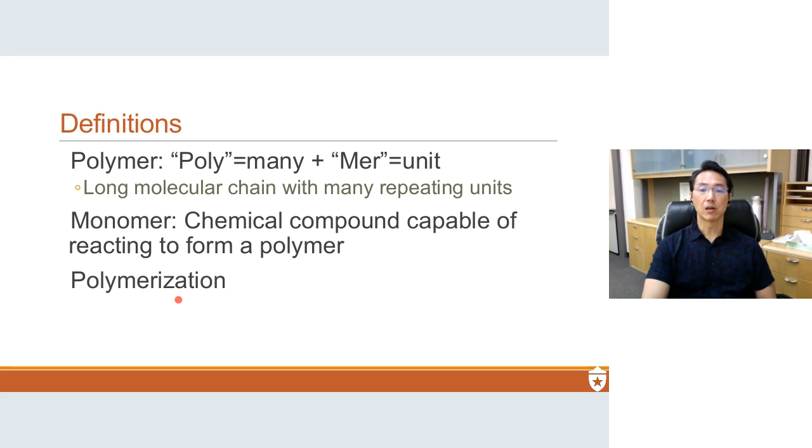So we have here: monomer plus monomer plus monomer, through polymerization, gives you a polymer, as you can see, where the molecules are connected, covalently connected to each other.

The simplest example is polyethylene, where you start off with an ethylene molecule, and you have the carbon-carbon double bond. Through the process of polymerization, this double bond is attacked and opened up, and so is this one, and they form a bond between each other, and now you get a long polymer called polyethylene.

So what we just saw was a linear polymer, where you have these mers connected to each other, forming a long chain.

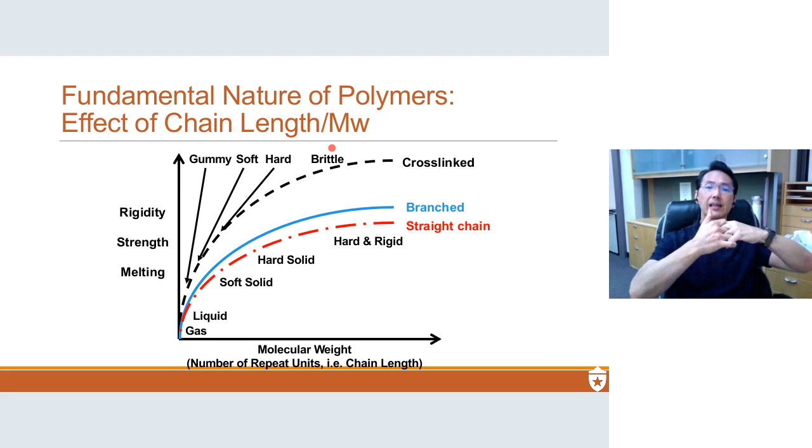And if you look at this, the fact that it becomes brittle here - not that these others are not brittle, they can be brittle if the molecular weight is high enough - but cross-linked materials become brittle much more quickly. And again, that's kind of why it is, because they can be locked into each other and they can't flow, like someone said. They can't be drawn.

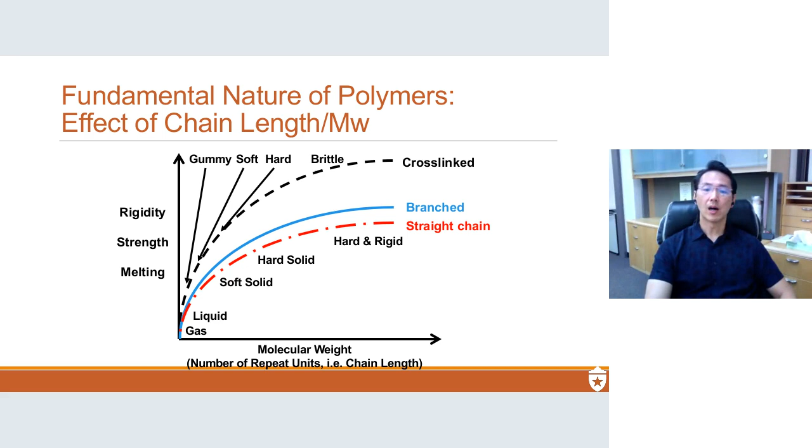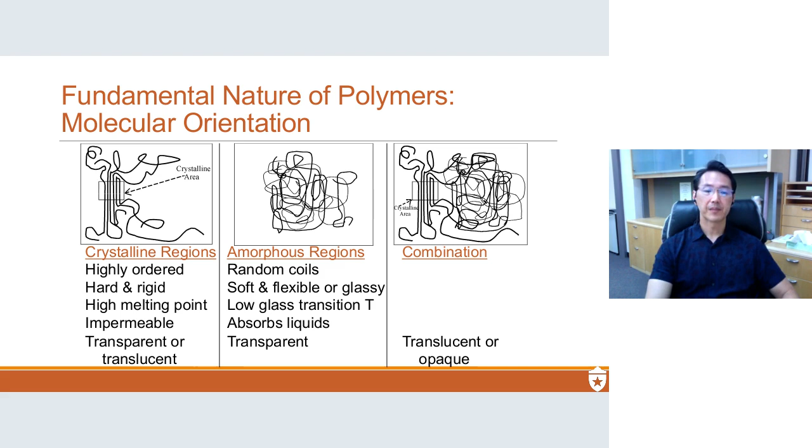So my second demonstration is actually using a plastic strip, and you can do this at home just to see what it feels like. This is Corey, by the way. This is actually a demo that I used to show my brute strength as well as finesse, and I asked for several volunteers to come down, male and female, strong and not so strong.

We have a little competition where the students come down and I give them these plastic strips, and they start to stretch it. The competition is to see who can stretch it to the longest strip possible. I can tell you without bragging that I've never lost this competition. So this year will be the first time I'm not able to demonstrate that, but Corey has done a wonderful job, so I wanted to show you how. If you listen carefully, she's going to try to tell you what it feels like as she is stretching. So listen to that.

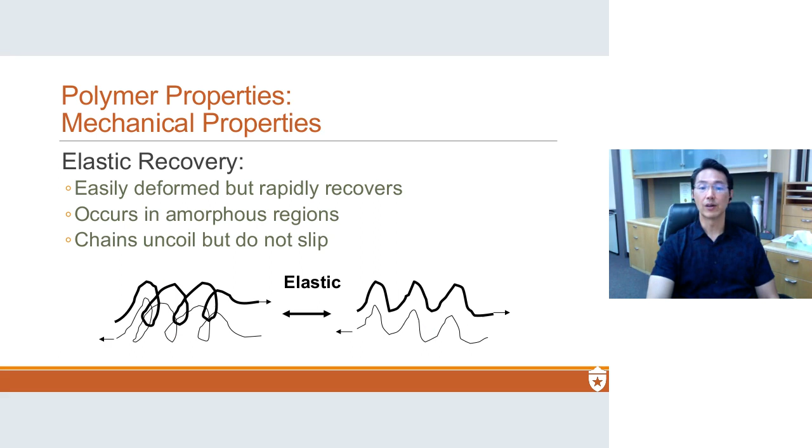And then the second part was the plastic deformation, where it's deformed and it can be molded, and the deformation is permanent. The chains do not uncoil, but they actually slip past each other, and it's irreversible. Once it slips past, you can't get it to unslip.

Now, in the case of polymers, as you saw with this demonstration, you have viscoelastic behavior. Viscous meaning plastic, and elastic meaning elastic—so it's a combination of both plastic deformation and elastic recovery. It applies to most polymers, and they're affected by chain length, cross links, temperature, and rate of force.

And what you have is as you stretch out, first it uncoils, then it starts to slip, and then it recoils a little bit when the force is taken away. And if you think about our stress strain curve, you have this curve that's initially straight—that's the elastic portion—and then it deforms. That's kind of what viscoelasticity is, and polymers all have that kind of stress strain curve.

Now it says here that it's affected by rate of force, the viscoelastic behavior. What do you think that means?

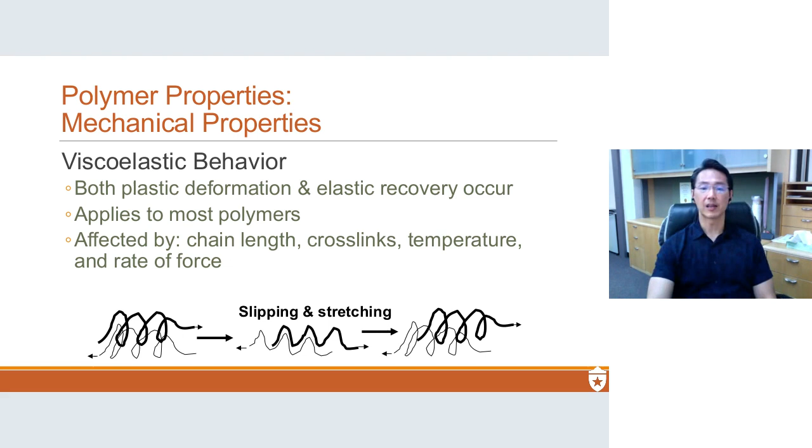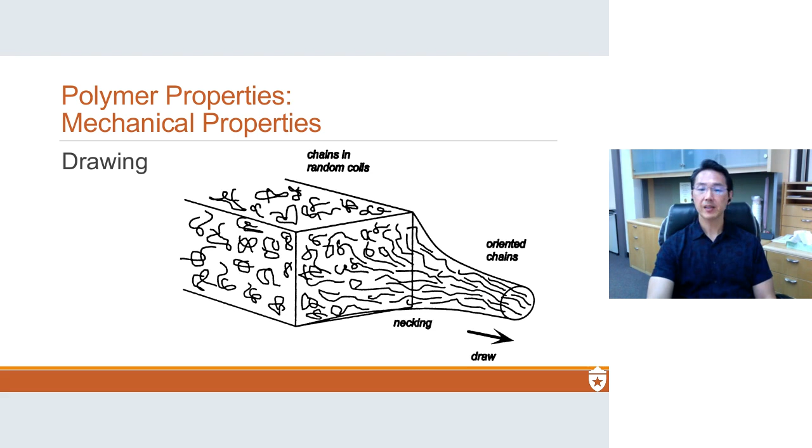That's what viscoelastic behavior is - basically both types of mechanical properties exist there. This is a schematic of what just happened. As you have these amorphous regions and pull together, you start to orient the chains and give it a crystalline orientation.

To show viscoelastic behavior, here's another demonstration. We're going to cure polymethyl methacrylate, which is widely used in dental materials and medicine. PMMA, which we'll talk about more in a few weeks, has applications as impression trays, denture material - that's the big application for dentistry - and bone cement in orthopedics. Polymethyl methacrylate is really the basis for how we developed composite filling materials.

PMMA polymerizes through a process called addition polymerization, which we'll talk about later. As it polymerizes, we're able to see a whole bunch of different material properties. I had Corey, who's been doing research with me on developing an antimicrobial polymethyl methacrylate denture material - she's an expert in making this - so I have a video of her doing different stages of it.

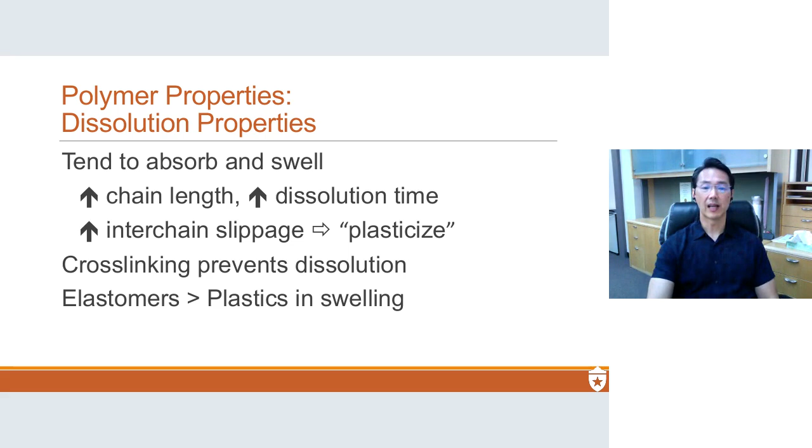So for my next demo, we're going to look at crystal soil. This demo, I actually had a different demo before, but one of your colleagues from the class of 2017, Kristen Rodriguez, came to me one day with the crystal soil and said, Dr. Wine, this is a wonderful demonstration of polymer swelling. And sure enough, it was. So crystal soil is made by using acrylamide monomer and polymerized into polyacrylamide.

Incidentally, the same material, although not in its same form, is used in diapers. So if you know anything about diapers, basically they absorb a lot of water, right? That's the whole point of having a diaper, right? And so crystal soil is used instead of soil to hydrate the plants. And when you place it in water, it can absorb 80 to 150 times its volume in water. Okay, so I have a little demonstration of that here.

So this is crystal soil, and you can see how small it is. And if I drop it... I don't know if you can see that, but it's completely elastic. It's very hard, very glassy kind of a material.

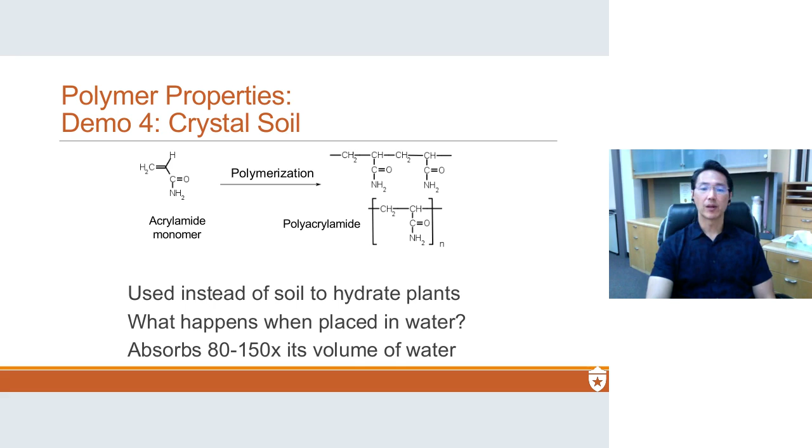The next property, the final property we're going to talk about for polymers today is thermoplastics. Thermal properties. For polymers, they exist in two types of thermal polymers. The first type is called thermoplastics, and what that means is that when you heat it up, they become softened, they become softer. When you cool it down, they get hard again.

We talked a little bit about this before with glass transition temperature, which we will look at in a bit. But if you heat it up, it gets softer. When you cool it down, it gets harder. You can mold it when it's heated up, and if there's a way of molding it back to its original shape when it's heated up, and you cool it down, it'd go back to that. So it's reversible in that sense. There are no chemical bonds that are formed during this heating process.

However, another group of polymers are thermosets, and these are cross-linked polymers. They're called thermosets because they can be formed or cross-linked using heat as an acceleration for the polymerization. So if you did that, then you would have a liquid or a soft solid, and you would mold it into shape. Then you'd heat it up. Then it would polymerize and cross-link. And then when you took it out, you would have a definite shape.

And even if you heat it up again, you cannot soften it. Well, it softens a little bit, but you cannot have it plastically deform. It'll just hold a shape. That's because the cross-linking bonds the neighboring chains together, so you can't flow the material. This process is irreversible. Once you set it into a certain shape, you can't unset it. That's why it's called thermosets. So those are the two types of materials that we tend to see.

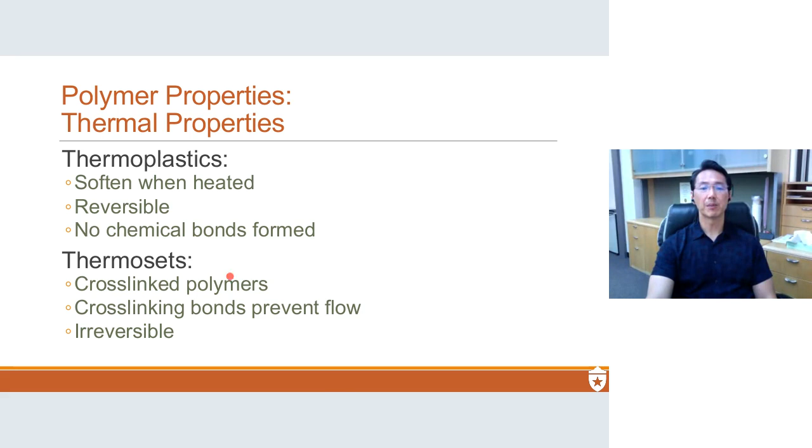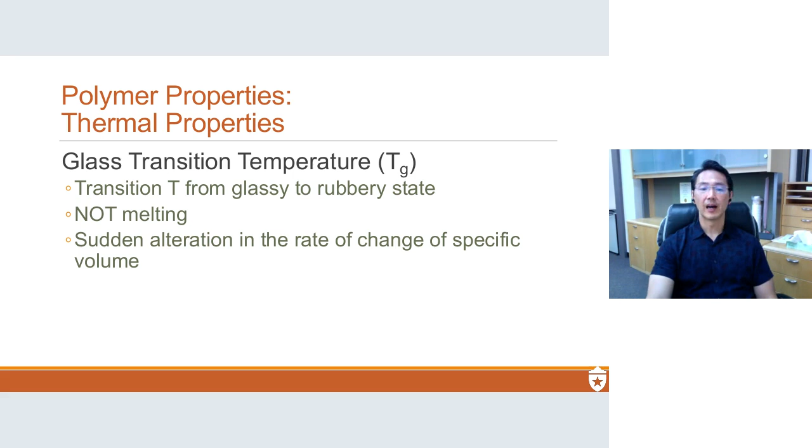Now, as we describe this more, I mentioned a little bit about glass transition temperature. Basically, that's the transition from glassy to rubbery state. It's very important that you understand that it is not melting. In a technical sense, the actual definition of glass transition temperature is a sudden alteration in the rate of change of specific volume. So let me illustrate that with this graph.

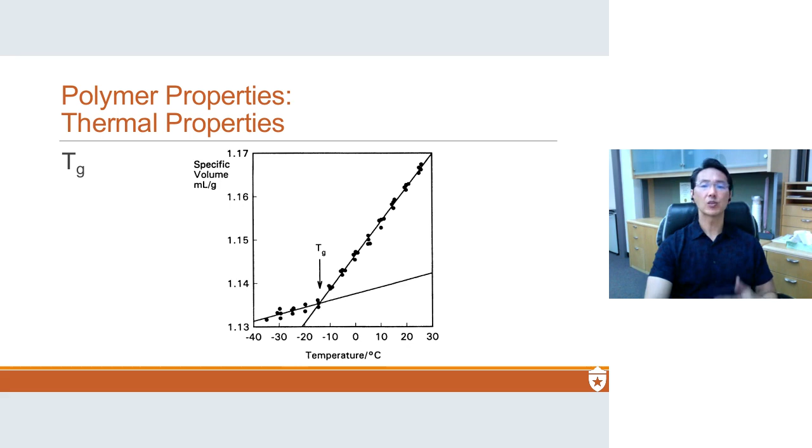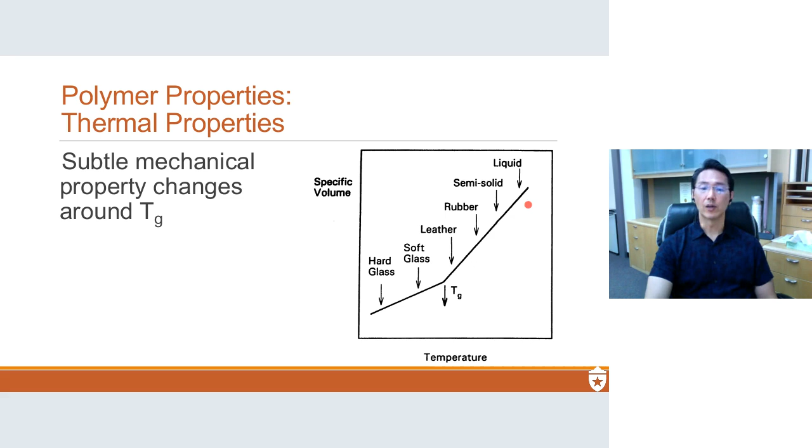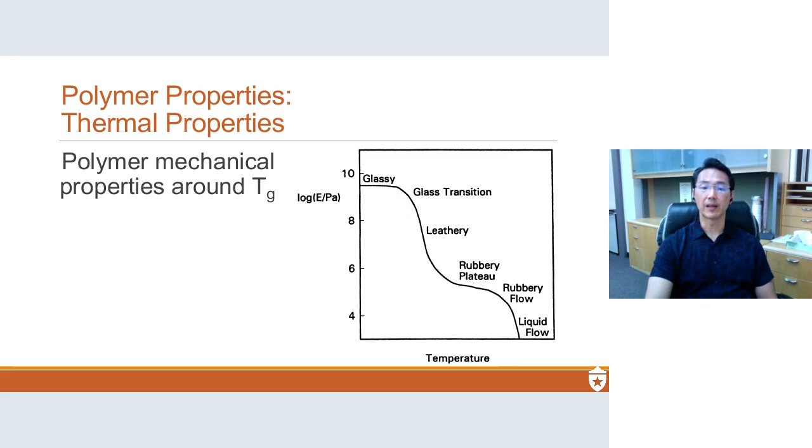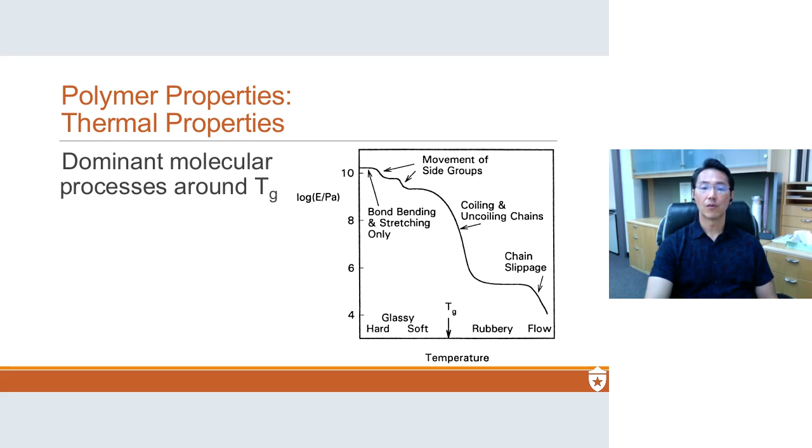For my next demonstration, I used to do a demonstration with suture material. Polylactic co-glycolic acid is a suture material, and what I did was I made a really nice puck out of this, and it was a very glassy puck. I had students come down and try to break it or bend it, which they couldn't. Then I left it in a 60-degree water bath, and after that, you can see that it was very leathery. Unfortunately, one year I had this really buff guy, almost as strong as me, and came down and he actually broke the thing. So I no longer have this demonstration.

However, I realized, as I contemplated what else to do, I came across this video, and I actually realized this was a better demonstration than what I had, so we can watch this.

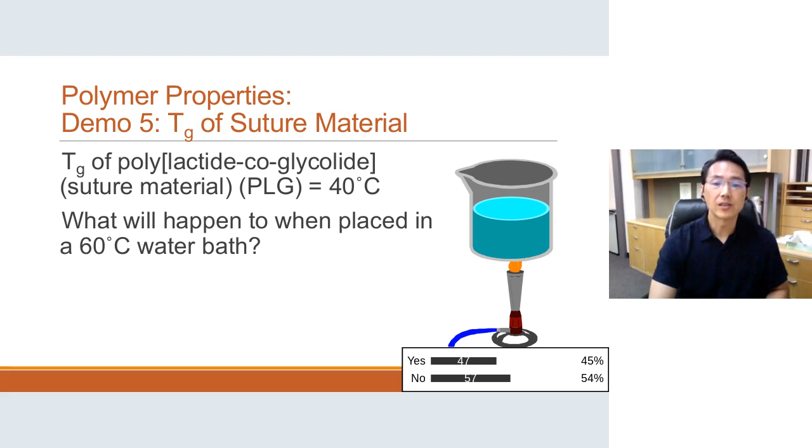So actually the last part of the polymers lecture is chemistry of polymerization. We're going to start off with addition polymerization, which is what polymethyl methacrylate does.

There are four steps to this polymerization process. First is activation: you have an initiator, something that can form a free radical, and in the presence of heat, or at room temperature with an accelerator, or light in the case of dental composites, it's able to become a free radical. With our polymethyl methacrylate denture material, the initiator was benzoyl peroxide, and it had an accelerator that caused it to become a free radical.

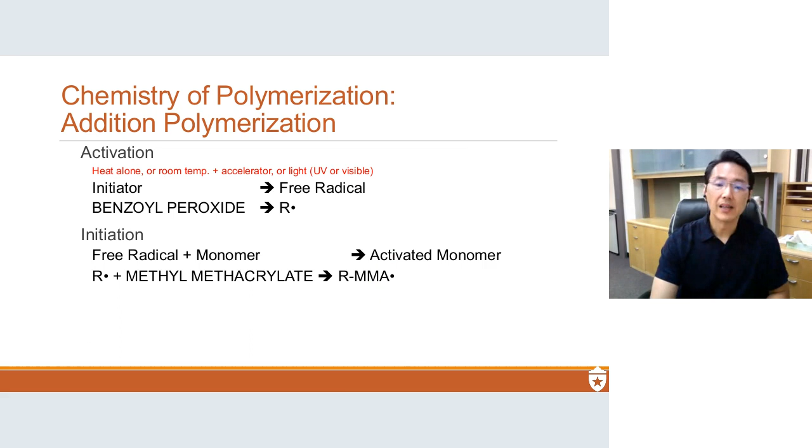The next step is the free radical attacking a monomer, methyl methacrylate, becoming an activated monomer—you can see the free radical at the end of the monomer. Then propagation, where the activated monomer attacks another monomer and the chain starts to grow. Finally, termination, where two activated monomers or polymers bump into each other, since they have two free radicals, they react with each other and terminate the reaction. So that is addition polymerization.

A second type of polymerization is condensation polymerization, one of the two main types. It's also called step growth polymerization, because in this situation it's not like you grow a chain—whenever the reactants are there, they just react together in one step. The monomers react simultaneously, and a catalyst is used.

Usually, not always, but usually, small molecules are condensed out, for example water or hydrochloric acid, and that's why it's called condensation polymerization. This is an older name; the more scientific name is step growth polymerization, because there are some reactions where you do not have any condensate.

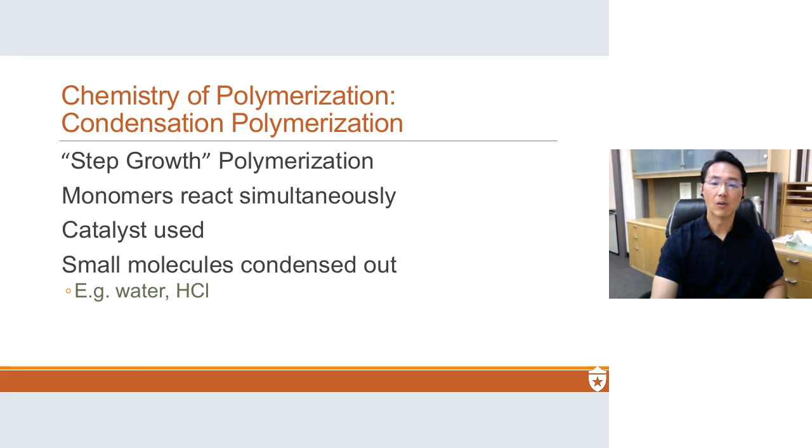My last demo for this lecture is the nylon rope trick. Basically, nylon is made when you react sebacoyl chloride and hexamethylene diamine together in the presence of sodium hydroxide, and you form nylon, a polymer. You have a condensate, which is sodium chloride, and of course there's water left over.

One disadvantage of this polymerization reaction is that if you have condensed byproducts and that is able to evaporate, it can cause porosity and shrinkage. If it stays there and does not evaporate, it can plasticize the polymer. So that's a disadvantage.

Here is the video of the demo. We actually do this in class.

So I'm pouring in sebacoyl chloride in chloroform, and I quickly pour in the water phase, which is hexamethylene diamine in sodium hydroxide, which is in DI water, distilled water, or deionized water. You can see from all the smoke that something is happening there as I pour that in slowly.

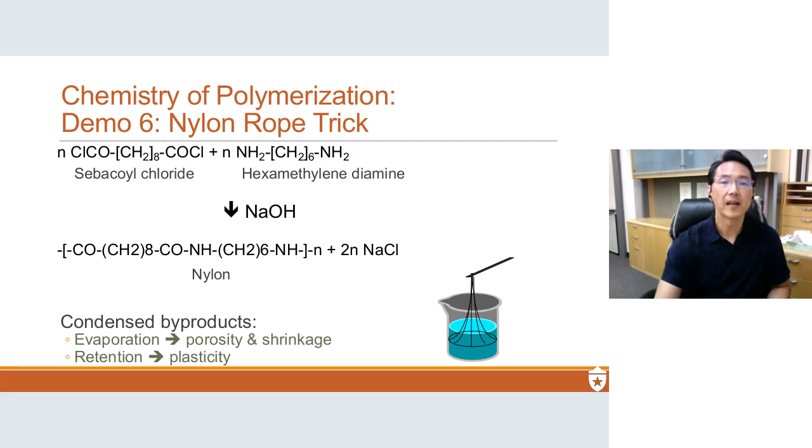Okay, so let's continue then and move on to our next lecture, which is the first application of polymers, and that's dental waxes. The only reason we talk about dental waxes first is because that's what you have already started playing with in the lab component of the dental anatomy module. So hopefully this lecture will help you understand what you are using.

We'll get to some of the other finer points as we talk about this. So, dental waxes are very widely used. They soften when heated, solidify when cooled - well, that's just what we learned about polymers. They can be readily molded without cracking, which is something I'll be talking more about - it's a kind of unique property of waxes.

I do not believe you get to see this in your current lab because you are doing the drip wax technique, which I was a little surprised to find out because that's not how you're supposed to mold your wax. But anyway, I think for whatever purposes you're doing right now, that's what they're using.

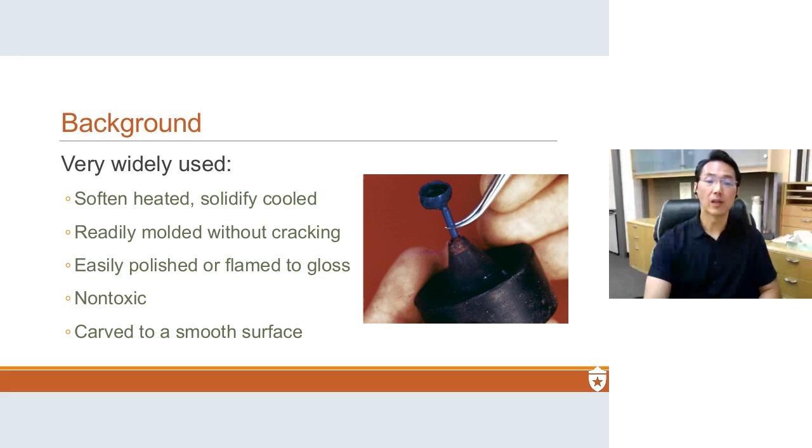But anyway, waxes are used for that as well as other things. So waxes are moderately large hydrocarbons. They are polymers technically, but a lot of times when we talk about polymers, we talk about polymers with higher molecular weight. A small molecular weight polymer would be called an oligomer, usually about 10 repeating units or so.

Waxes are relatively large hydrocarbons. They are larger than oligomers, but they are not often referred to as polymers. They have weak intermolecular forces, which gives rise to some material properties like very large thermal expansion, a very low yield point or yield strength, and poor dimensional stability.

Before I move on, I just want to talk about this word stability. Throughout my lectures, you will often come across the terms stability and accuracy. The difference is that accuracy is when you first make something, it comes out accurate - it represents what you want it to make: size, shape, surface detail. Stability is after you made it, over a period of time the dimensions don't change, or they do change. So stability is over a long period of time, accuracy is as soon as you make it. So waxes have poor dimensional stability.

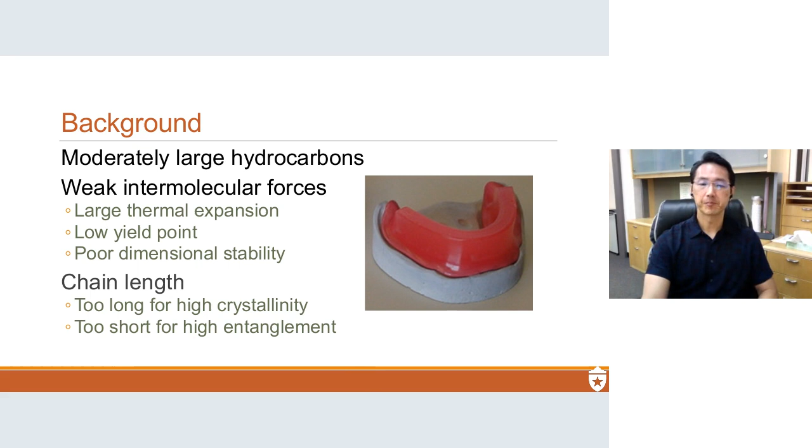So the simplest of waxes are the alkanes, which is polyethylene. But in this case, it would be a very low molecular weight polyethylene. The chain lengths are generally larger than 17 repeating units, and at that point you get a melting point of about 22 degrees Celsius.

But they're not the only polymers that are in waxes. You have esters, which have ester groups in the middle, and these are the most common in dentistry. You have alkanols, where you have an alcoholic hydroxyl group at the end, or alkanoic acids with carboxylic groups at the end.

So you can have mixtures of this. Mostly they are esters and these alkanes, and that's what gives rise to waxes and their kind of unique properties.

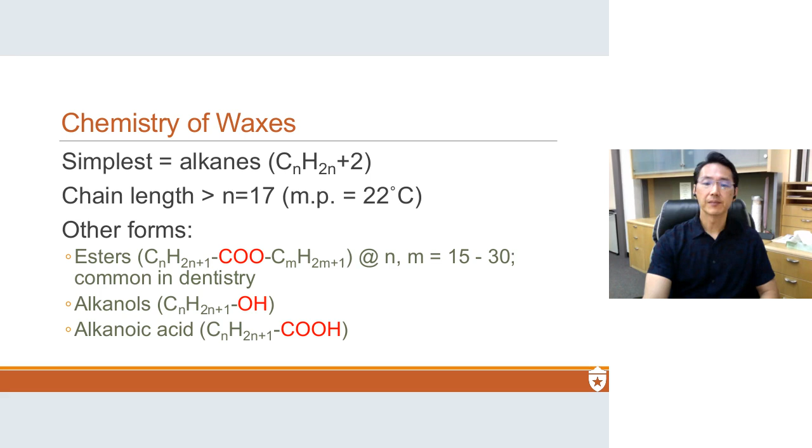Overall, waxes can be categorized as natural or synthetic. Among the natural waxes, you have mineral waxes, where paraffin is the dominant one that's used, and that's obviously what you use for candles. They're mainly linear and branched hydrocarbon chains.

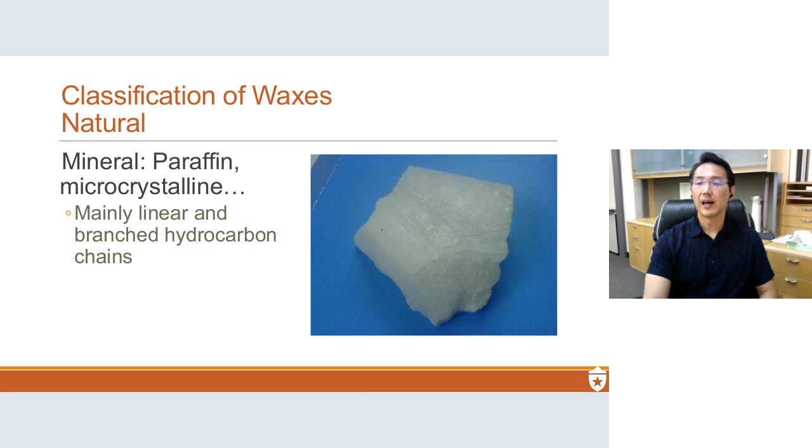Another very popular natural wax is plant waxes, and one of them is carnauba, which is very strong for a wax and is used a lot for waxing cars. These are mainly esters, hydrocarbons, alcohols, and/or acids, so they have a mixture of all of these different types of polymers.

And it is one of the main components of dental inlay wax. There is also insect waxes, like beeswax, and that's kind of where we get the name wax from. As you can see, there are just various different forms of waxes in nature.

One thing to understand about these waxes is that it's not like a polymer where you only have one type of molecule. Waxes have a variety of different polymers in there, as well as other additives, and that's why they behave differently from some of the synthetic polymers that we have.

The other type is synthetic wax. The advantage, of course, is the uniformity in chemistry, and they're also much larger polymers, so they'll be stronger. However, that's kind of not what is needed as far as properties for dentistry are concerned, so they really have very little utility as far as waxes in dentistry.

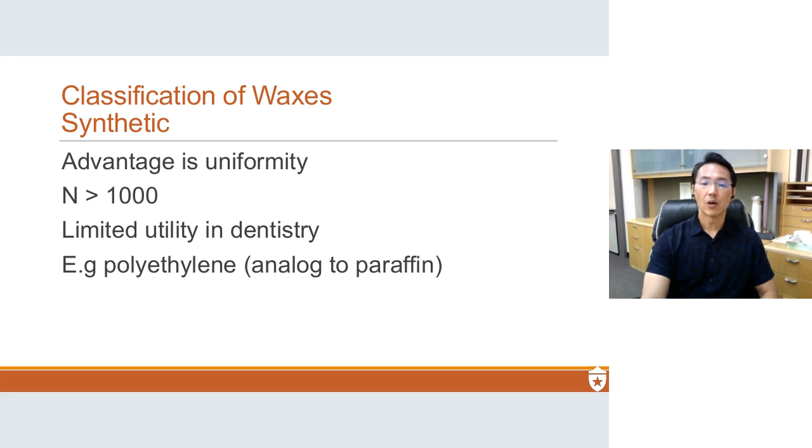So when we look at dental waxes, there are two major classes of dental waxes and a third minor class. The first major class is pattern wax, and like the name suggests, they are used to create patterns, forming a general predetermined size and contour for restoration.

A disadvantage of these waxes is that they have thermal dimensional change. In other words, they're not very thermally stable, and they tend to warp upon standing. That's because they have to be able to reproduce very fine detail, so they need to be softer than some of the other waxes.

Used for crowns and bridge units and so forth, and they're used in this lost wax technique where you invest it, then you heat it up and all of the wax is lost. Then you put in the metal or metal alloy to create the pattern.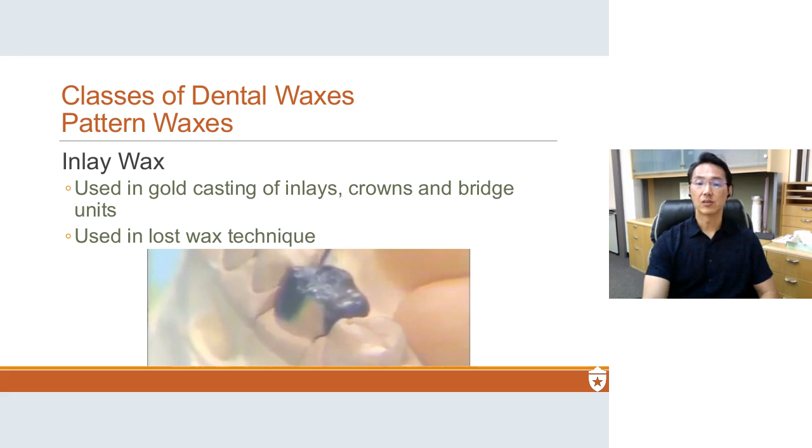The second type of pattern wax - these are kind of straightforward, the details are all in the handout, so I'm moving past these pretty quickly because they're not really concepts. The second type is the casting wax.

As you can see, these are used for metallic frameworks of removable partial dentures. You can see here how this has been waxed up for a denture framework. This also uses the lost wax technique and casting investments to make a metallic framework like this.

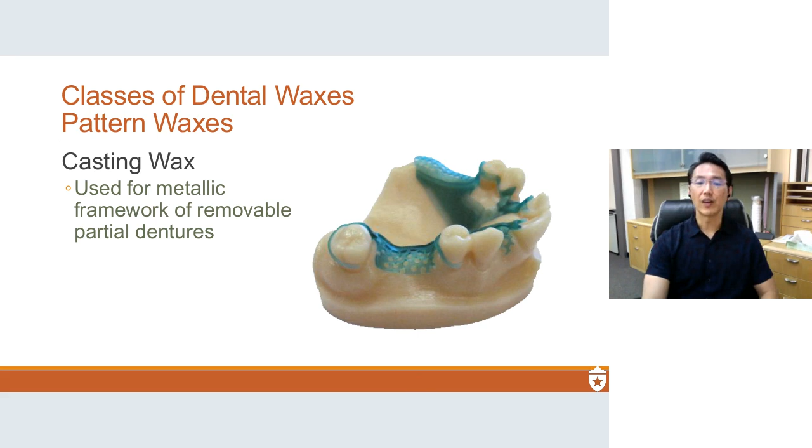They're used for indirect applications, so casting waxes can come in different forms. You have these preformed bars, or they have meshes. They also come in clasps and different retention forms, so it just makes it easier to make those patterns.

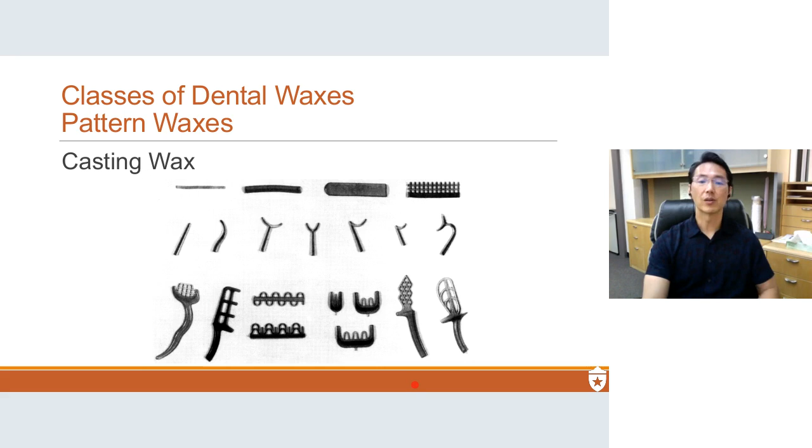The third pattern wax is the base plate wax, used in full denture construction to establish the vertical dimension and plane of occlusion, as you can see used here and over here as you create these dentures.

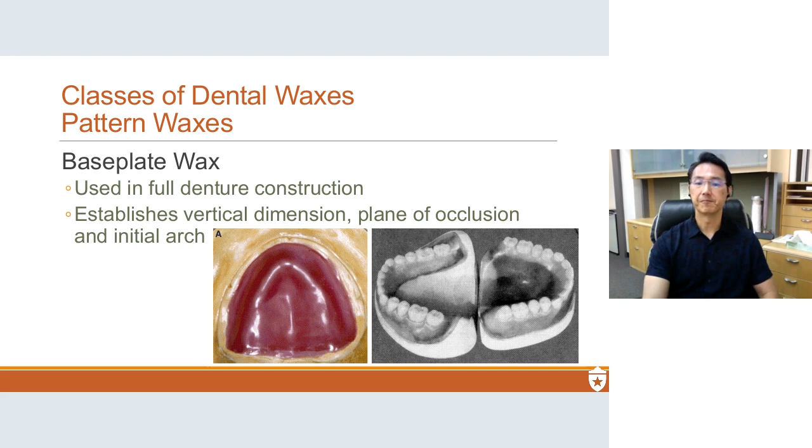Base plate wax can also be used as a bite rim, as you can see here, to restore the occlusal relationship, register arrangement of teeth, check the denture inside the patient's mouth, and so forth.

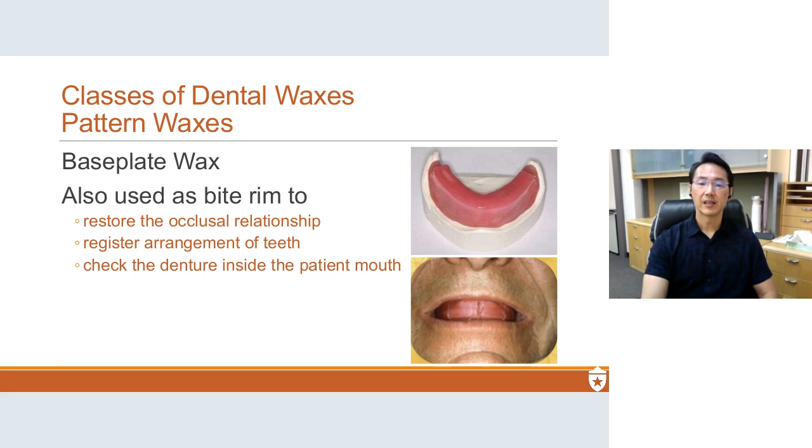You also have utility waxes. These are used in many different applications. You can use them to extend trays, build up the edges when you put in the impression material, and so forth. And they can come in both stick and sheet forms.

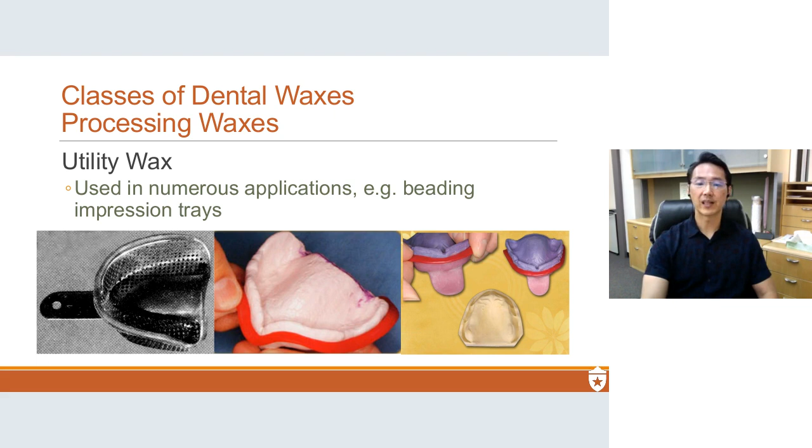The third type of processing wax is sticky wax, and it can be used for temporary holding of broken dentures, for repair and things like that. The unique thing about sticky wax is when you melt it, it's really sticky, and when you cool it down, it becomes very firm and brittle.

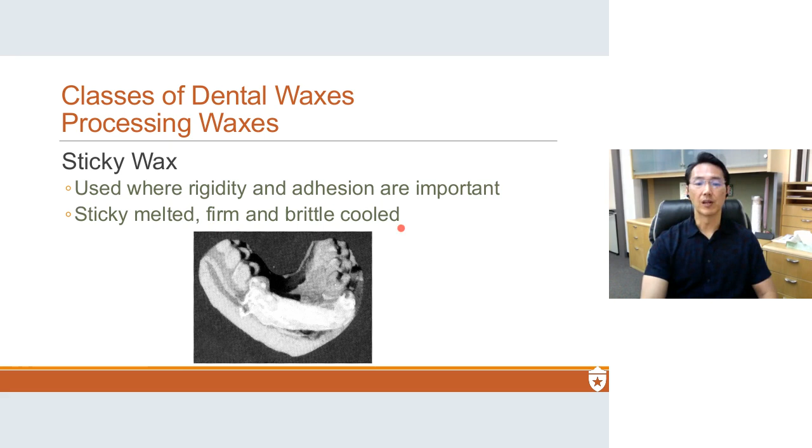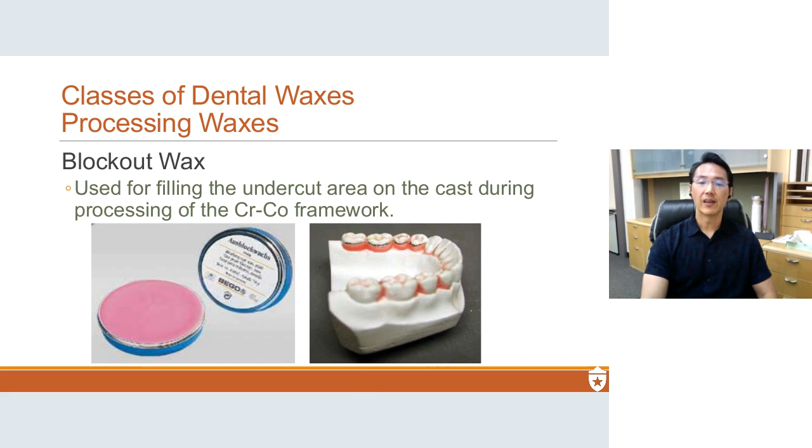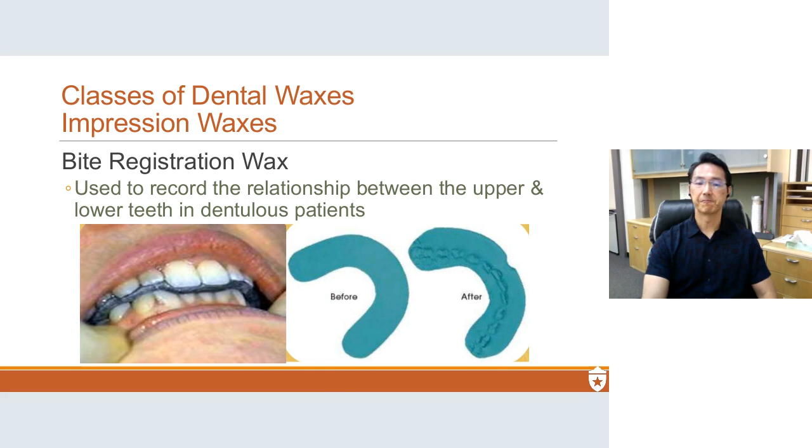So dental waxes not only have these polymers, but they've got some other additives as well, such as gums, fats, and resins. Gums are generally plant products; they're viscous, amorphous, and harden when dried. They're a mixture of hydrocarbons, so other kinds of polymers.

Fats are basically glycerol and some other fatty acids, and they're mainly used to modify the melting range and to soften paraffin. Resins are plant products used to modify melting range, hardness, adhesiveness, flake resistance, gloss, and toughness of the wax itself.

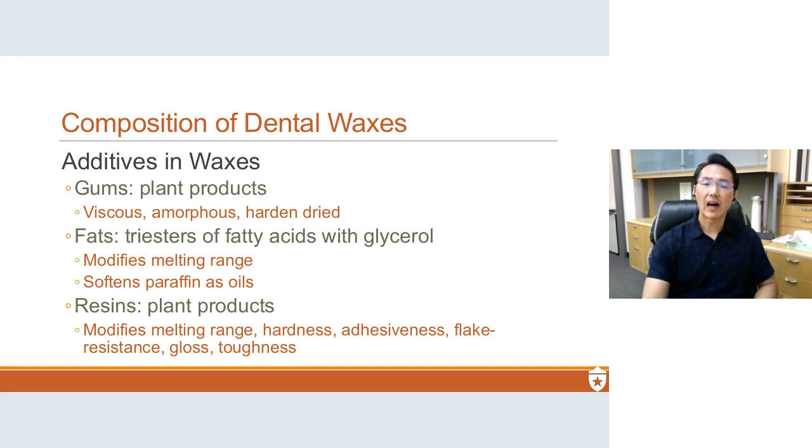So you can see the composition is very complicated. Every company has its own proprietary composition to adjust the properties of waxes, giving rise to very unique properties, as I keep mentioning. So what we're going to focus on most of the time is different physical and mechanical properties of waxes: melting range, solidification, shrinkage, and all of these.

The first one is melting range. We learned that as you increase molecular weight of polymers, the melting point increases. But when you have a mixture of polymers, there actually no longer is a melting point.

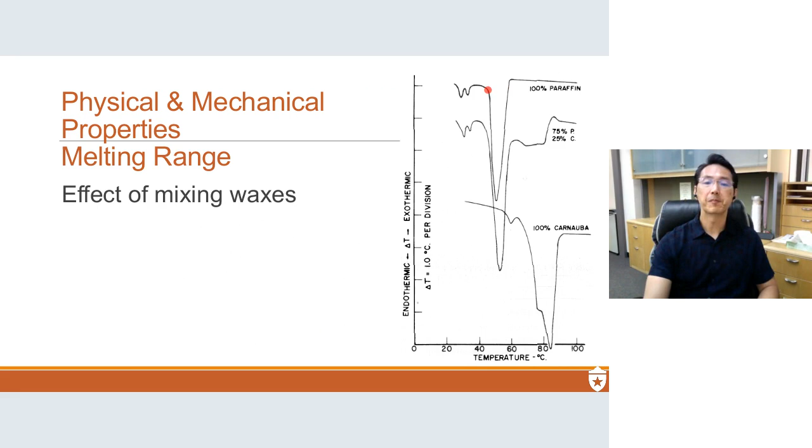The next property is solidification shrinkage, and this is very important because waxes shrink more than any other dental material when they go from a liquid to a solid. For paraffin, it's 11 to 15%, which is huge. So if you had a 3-unit bridge and melted the wax when you made that pattern, and then it solidified, it's going to end up the size of like a 2.5-unit bridge. That's huge.

Now, most materials shrink when they solidify, right? But there are a few that do not. Ice is one—when it goes from liquid to solid, it actually expands. Silicon, bismuth, antimony, and gallium all expand when going from liquid to solid. So not all materials shrink when they freeze. But for waxes, our problem is the shrinkage.

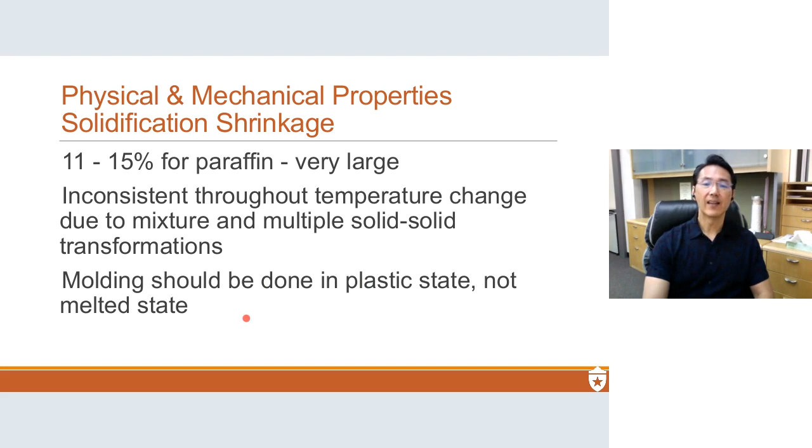Furthermore, the change in dimension is not consistent throughout the temperature range, and that's because you have so many different mixtures of chemicals and polymers in there. This gives rise to multiple solid-solid transformations that we'll look at, and this allows us to mold waxes in its plastic state, not in the melted state. We'll talk more about this.

Carnauba has a very low coefficient of expansion because of the strong secondary valence forces due to the high concentration of ester bonds. That allows it to act more normal, I guess.

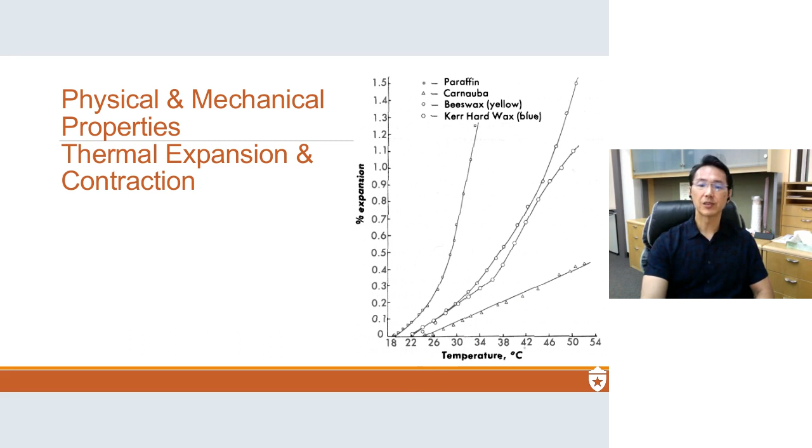Waxes also have the lowest thermal conductivity and diffusivity of any dental material we use—1/3000th of silver, 1/10th of enamel. That's why you need to heat waxes really slowly, so the heat actually moves through the wax. Otherwise, you might get melting on one side without realizing it, and then get a lot of shrinkage when you cool it down again—remember, sometimes melting isn't visible. So it's really important to be patient with your wax. In your labs, you use a drip wax technique, so it doesn't matter if you melt it. But when you're actually making patterns, you're not supposed to do that—heat the wax slowly so it's thoroughly heated throughout the whole material.

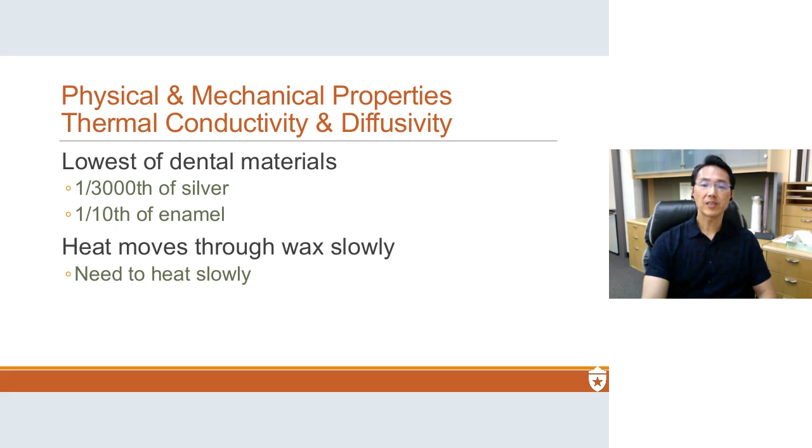The next property of waxes is the solid-solid transformation. I talked about molding into plastic state. At low temperature, the structure is an orthorhombic lattice, and it's very rigid, like glassy. Well, it's not glassy because it's waxes, right?

But it's analogous to the glassy stage under a glass transition. As the temperature increases, it goes through a transition into a hexagonal structure, and it makes it moldable, but it has not entered the melting temp range yet. So it hasn't melted, but you can actually mold it. It's softer, it's moldable, and you won't have that problem of huge shrinkage as you go from a melt to a solid. So that's why when you mold wax, it needs to be done in this stage before the melt, before entering the melting range.

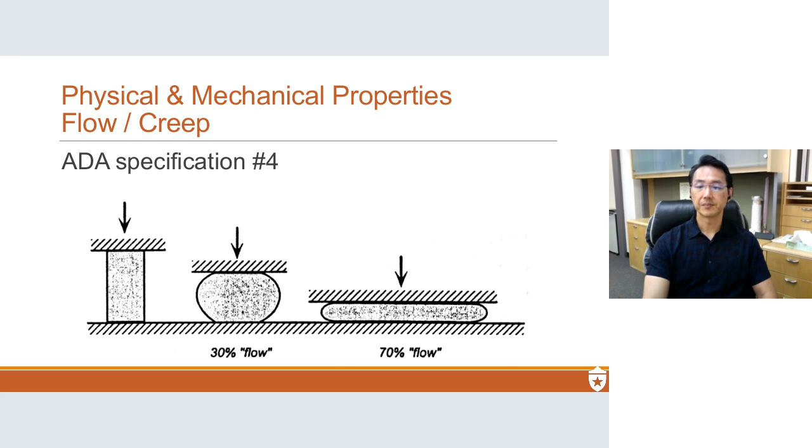So what you end up getting is this: as you increase temperature, the percent flow increases drastically for waxes. In this case, it's paraffin, and as soon as you pass about 30 degrees, it just flows really quickly. Then you have carnauba on the other opposite end—it just doesn't flow until a very high temperature. And then you have beeswax.

One reason why it's used in dental waxes is because if you look at the temperature, once you hit about 40 degrees, it starts to flow. So what you can do is warm it up, mold it, put it in the patient's mouth at a temperature slightly above mouth temperature so you don't give them thermal shock. Then inside the mouth it gets to body temperature at 37, at which point it doesn't flow as much. This is Kerr hard wax, a dental wax, and that's what they're exploiting as far as usability in that clinical situation.

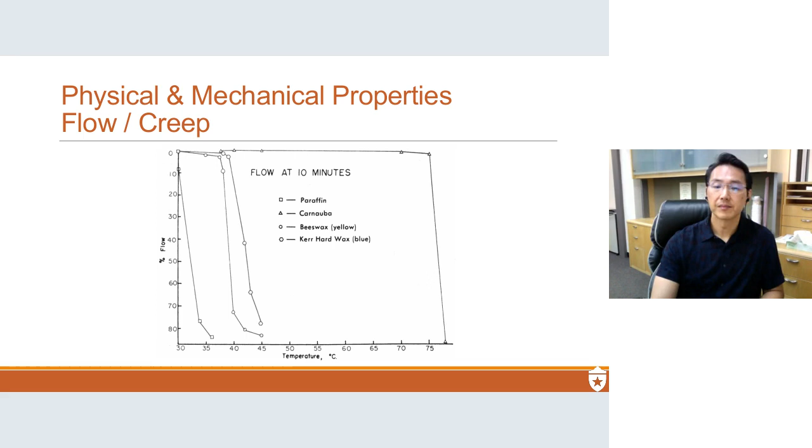Okay, there's a question here: can you clarify the difference between creep and flow? There is no difference—they are two names for the same thing. Creep is the more scientific term. Flow is a little bit more layman's, okay?

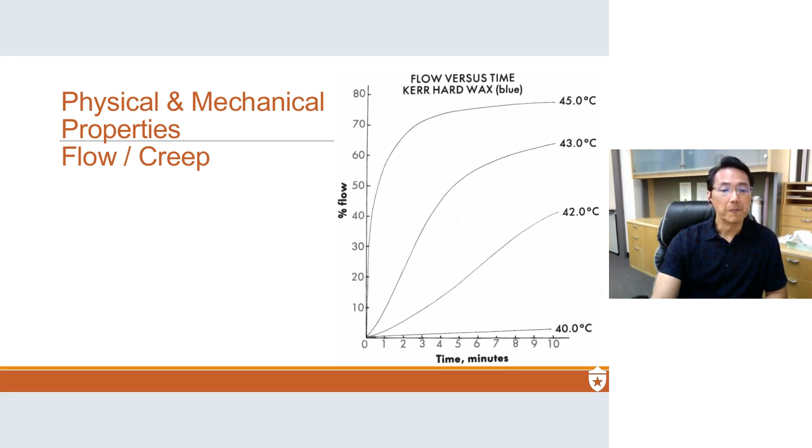Another question: creep is used in regards to metals and flow is used for flowable materials such as wax? Well, that's not true—creep is used for polymers all the time, and as I said, they are used interchangeably with flow. Okay, let's move on.

The next property is ductility. We talked about ductility, which is how much plastic deformation or plastic strain a material can have, right? The larger the plastic strain, the more ductile a material is, okay?

With waxes—now, another clarification here with flow and creep: ductility is kind of like the instantaneous expansion or deformation, okay? Flow is over time. So there's a time element to flow and creep, and for ductility there's no time element, okay?

Anyway, with waxes, they don't have melting points, they have melting ranges. So if the lowest part of their melting range is lower, then those materials tend to be more ductile. Let me say that again: the lowest temperature of the melting range, if that is lower, then that material tends to be more ductile than a material that has a higher entrance to the melting range, okay?

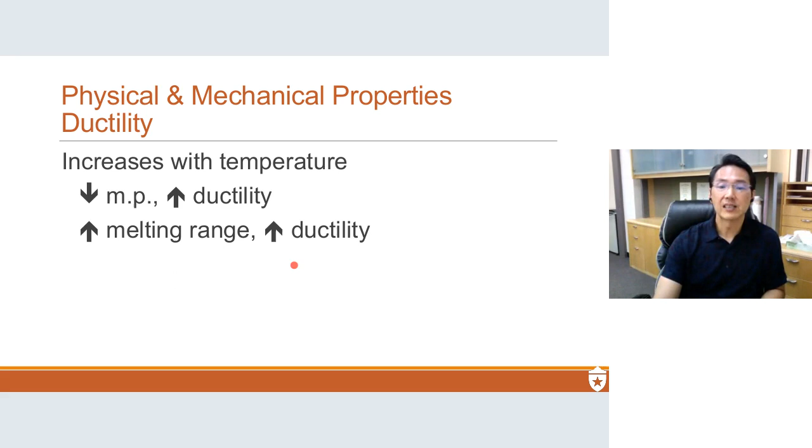Now, when you heat it up, let's say you put a compressive force on it, you squish it, hold it, and cool it down - you would have frozen in some stresses into that material. So the second time you heat it up, it will actually expand even more, because the frozen in stresses push the chains further away, adding to the expansion caused by the heating. That's what happens when it's molded in compression and you heat it up again.

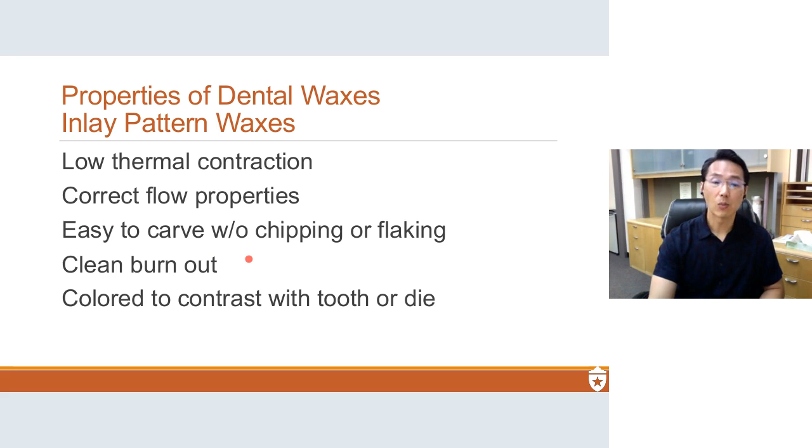Basically, for inlay pattern waxes, you want low thermal contraction because you're shaping it and the pattern accuracy is important. Correct flow properties, which we'll talk about in a bit. Easy to carve without chipping or flaking. Clean burnout, because you're going to use this in the lost wax technique. Color to contrast with the tooth or die. You have the direct and indirect types for inlay pattern waxes.

In the direct case, you're forming the pattern inside the mouth, so you want full softening within 5 degrees above 37 degrees Celsius, so the patient does not feel uncomfortable. At 37 degrees in the mouth, you don't want it to flow much at all, so it holds its shape. For indirect, you want it to soften at a slightly lower temperature because you're making it outside, so they have slightly different flow properties with respect to temperature.

For casting waxes, again, slight degree of tackiness. You're going to manipulate it mostly at room temperature, so you don't need low flow at body temperature. It just needs to be ductile at room temperature. So you can see that a lot of these properties have been adjusted for its different uses.

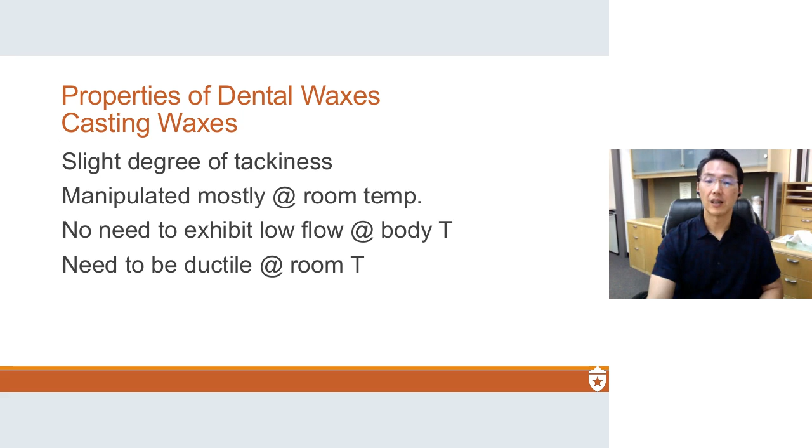And finally, base plate wax. These are some of the properties. The dimensional changes are very important for base plate wax.

I have a lot of pros residents doing research with me, and I've heard cases where they're in the lab the wee hours in the morning because their dentures don't fit. You would think you just make it into the shape of the mouth, the tooth, and put it on there and it should work. It's not. Patients are very sensitive to dentures that don't fit well, and that's actually the number one reason for denture failure -- it doesn't fit, and patients get sore spots and things like that. So the dimensional changes are very important for base plate waxes, since it's used in making or patterning dentures.

Okay, that's the end of the lecture for today. Are there any questions? Are you still awake?

Yes, okay, I had a question actually -- so the number one cause for denture failures is that they're not made in accordance with those dimensional or stress changes that are frozen in or whatever, and they just kind of over time change the way they fit, and that's why they fail, or what exactly were you trying to get at?

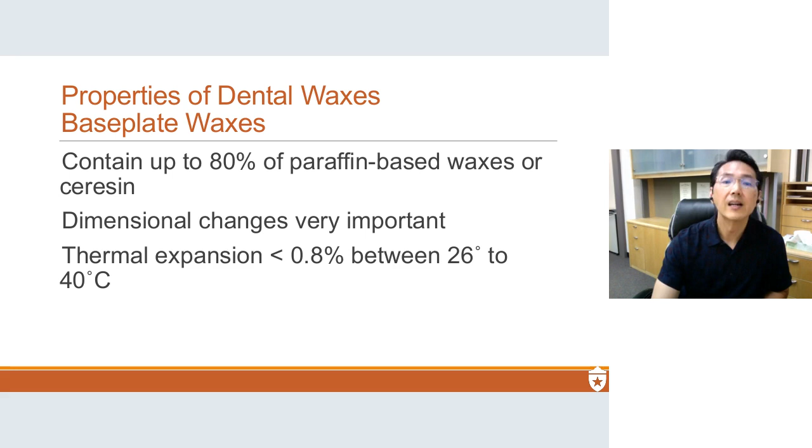Dr. Wang, do you mind going over slide 63, the physical and mechanical properties of stress relaxation? I got cut out. Oh, there you go, I think you sound better now. Can you repeat that please? I said, if you don't mind going over slide 63. Slide 63, yes. I don't know if my 63 is this corrective wax? What is it? It says physical and mechanical properties, stress relaxation. Okay, stress relaxation.

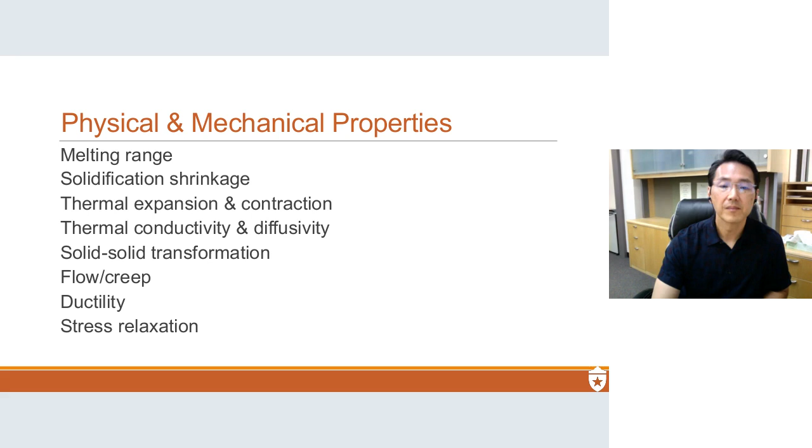So are you talking about the graph? No, the one where you had -- or the next slide, this one.

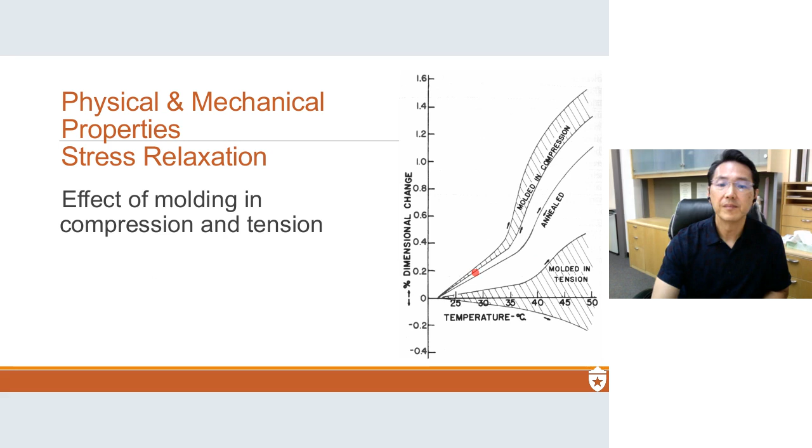Yes, this one. So basically in this situation, you heat up the material, you heat it quickly. So this part is cold and this part is hot, right? You didn't allow enough time to have the whole thing heat up. And on top of that, if you shaped it, molded it, then what you would have is a lot of frozen-in stresses. Just by shaping it, having heated and then shaped it, over time, because of the frozen-in stresses -- and in this case it's a compressive stress -- that stress will relax and push it out, and so you get this warping. This side is molded in tension, and over time that stress will relax and you'll get a compressive force. So together, it'll work to warp your wax pattern. Did that help?

Thank you, okay. Any other questions?